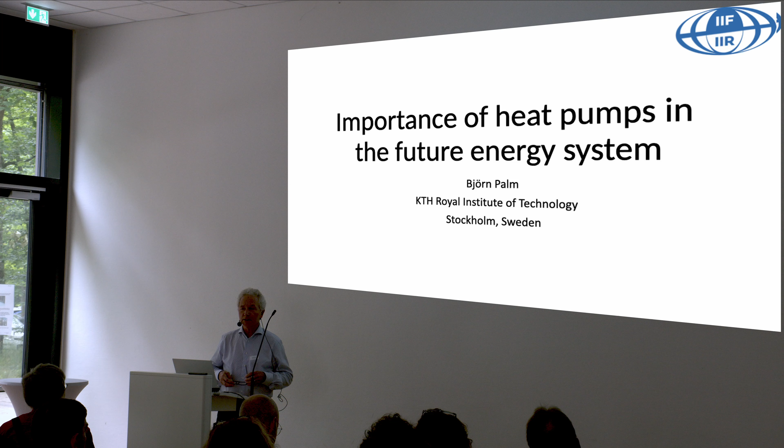If you look at the title, you can probably understand there are some similarities with the previous presentation, and you'll even notice some of the slides are more or less identical. But this will be a slightly different perspective, and it's too late now to redo the presentation. So let's go ahead and see what I have to tell you.

This is basically the outline of my presentation. I will mainly talk about these first topics: what is the problem, what is the solution, and what are the obstacles. Then I will talk a little bit about the last points here.

I realize this is a very informed audience, so in a way I will perhaps blow in open doors, but we will see what happens. For some other audience, I would be worried about having rotten eggs thrown at me, but I don't think this will happen today.

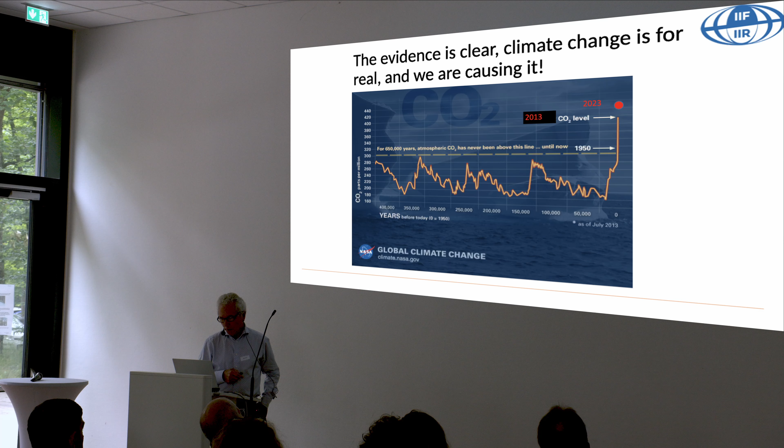So what is the problem? This is a problem. What you see here is a graph of the carbon dioxide in the atmosphere over the last 400,000 years. You can see that during all of this time, the concentration has never been above 300 ppm. And as you see, the concentration has increased incredibly during the last 50, 60, 70 years. This diagram was actually drawn from NASA's webpage in 2013.

Now if I put in the data for 2023, you can see that there is a noticeable change just for these last 10 years. So this is really alarming, of course.

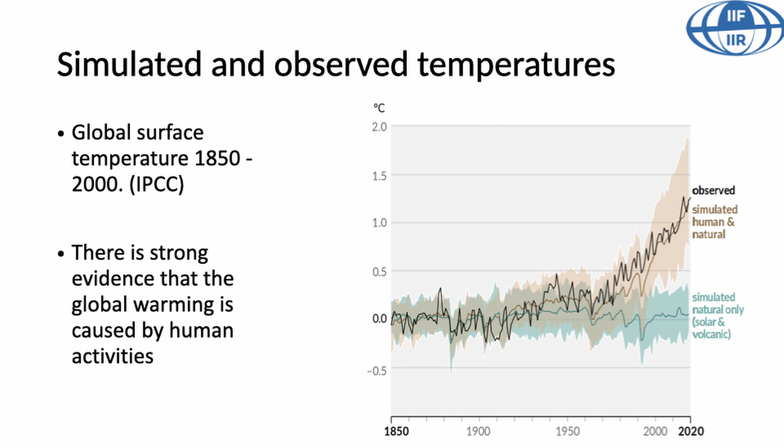What we see here is the result of simulations of global surface temperatures. This is the history, what's actually happened. With the same simulation programs, we can take out the emissions from our activities, and then we would end up down here. So we can show that without emissions from human activities, we would actually have about the same temperature levels as we used to have since the 1850s. I think this is good proof that it's actually our fault.

Now during the last year, a lot has happened actually. This is the global surface air temperature in July for the years since 1940 to 2023. You can see there is a steady increase, but also a drastic increase during the last year.

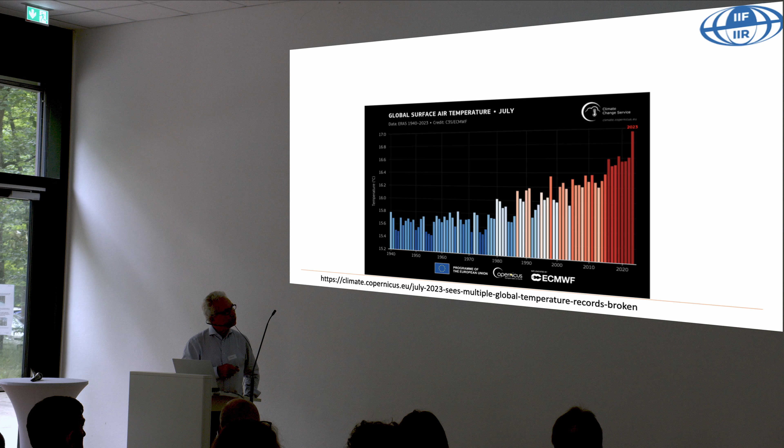We can also look at the last year from another perspective. This is showing the daily sea surface temperatures for most of the oceans over the years. Down at the bottom here you see further back in time, and the red line shows the temperatures during 2023 to 2024. You can see there is a big gap between the data for this year and all other years. So suddenly the sea temperatures have increased quite a lot, much more than they ever increased before.

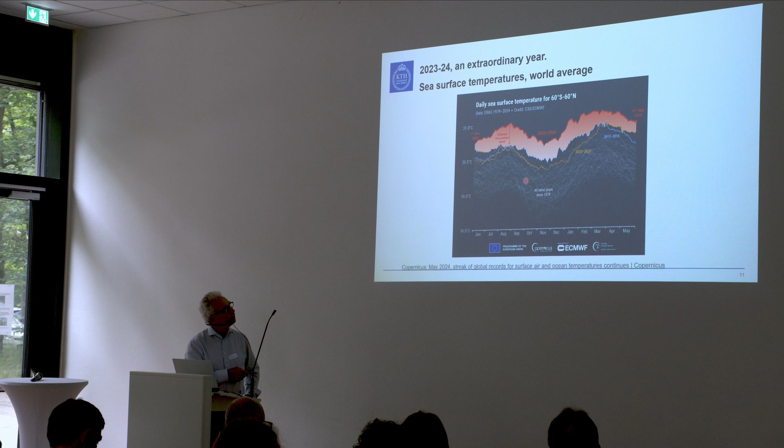And this is not yet explained why this is the case. So this is worrisome, I think.

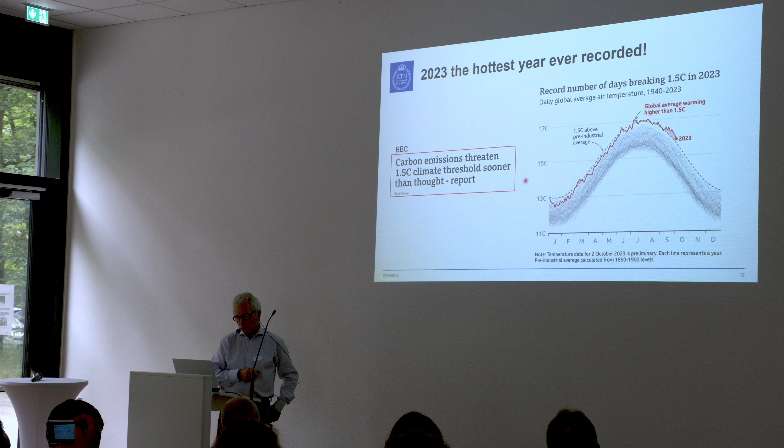If you just look at the temperature data for 2023, we can note that 2023 was the hottest year ever recorded, but recordings started in 1850 or so. So how about temperatures before that? Well, just recently there was a report in Nature claiming that 2023 was actually the hottest year in 2,000 years. And how can they find that out?

By looking at the tree rings on a lot of trees all around the northern hemisphere, this was deduced from that data. So global warming is happening.

It's happening at an increasing rate, and we really don't know what is happening during the last year because the increase has been much faster than we expected.

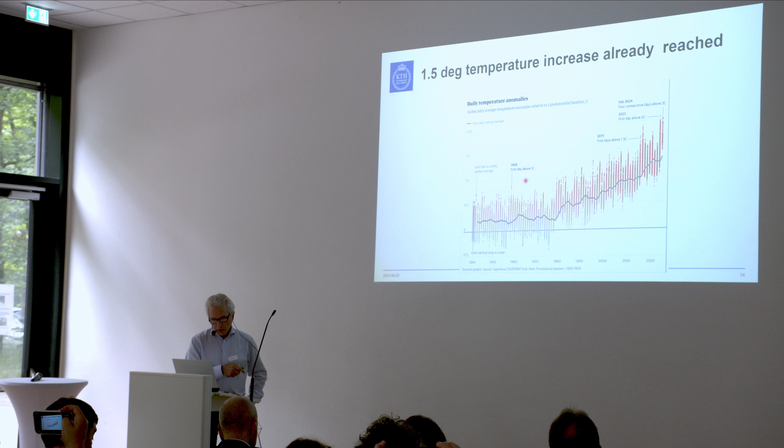This is also showing the temperature increase. The black line here is the 5-year rolling average, and you can see it's increasing, but it's lagging behind, so to say, as a 5-year average. The dots here indicate the days, with the temperature for individual days. You can see there are some days where we already reached more than 2 degrees above the pre-industrial baseline.

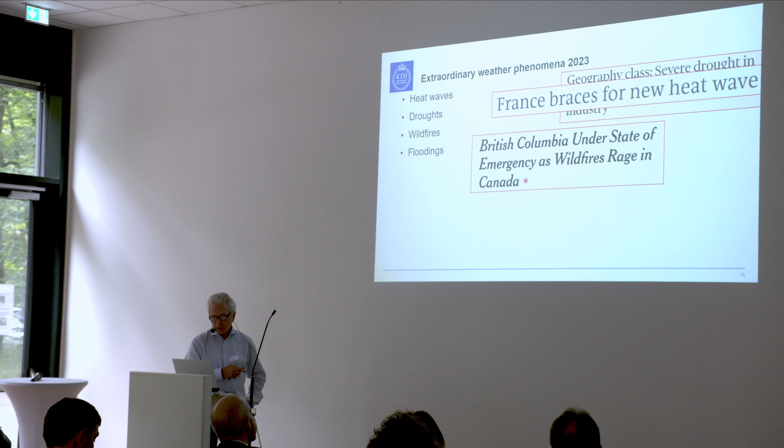So why do I tell all of this? We need a solution, of course. The solution so far has been the Paris Agreement—almost all countries in the world have agreed to do something about this and try to limit the temperature increase. This is the Paris Agreement in a nutshell.

On the vertical axis you see the annual global total carbon emissions, and the different curves relate to different scenarios. According to the Paris Agreement, we should keep well below 2 degrees, preferably at 1.5 degrees increase. From these graphs you see that to reach this we have to have not only zero emissions, but negative emissions after around 2050 or 2060—so not only stop emitting carbon dioxide, but also absorb it from the atmosphere.

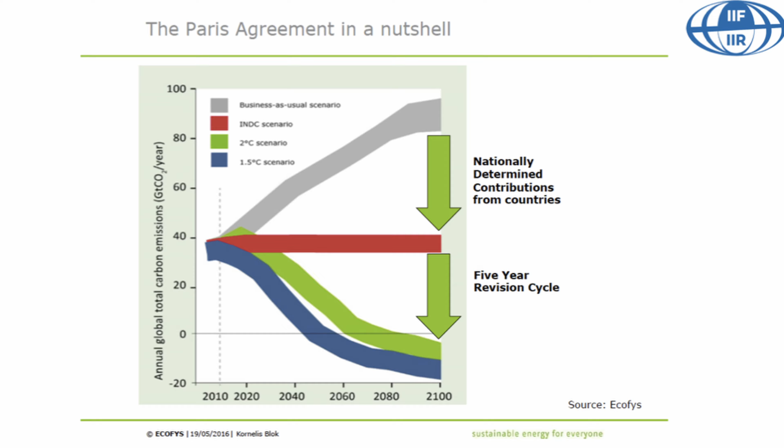Even though I speak to a lot of people from universities about their research, it seems a lot of times that people are really not aware of this still. They've sort of pushed this out of their mind. We have to stop using fossil fuels.

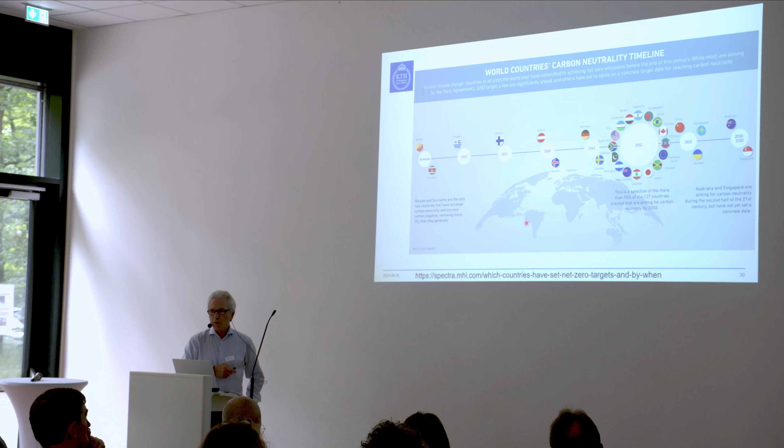Most countries in the world have now agreed on a year when they should be carbon neutral. You can see from this slide which year applies to which country, and for most it's 2050, just like Europe. That's not a very long time ahead. You probably remember when we celebrated the year 2000—that's 24 years ago—and this is more or less the same amount of years ahead of us to 2050.

So the question is, will we reach the goals? The UN has sent out reports saying that we may not do this—we may not reach these goals. We need to do more to reach them.

Recently there was an article in The Guardian where a lot of climate scientists were asked what they think the global warming will be by the year 2100. Each little box represents one person, and you can see that 77% of all the climate scientists expected a rise of at least 2.5 degrees. So the 2 degree goal is, according to most of them, out of the question.

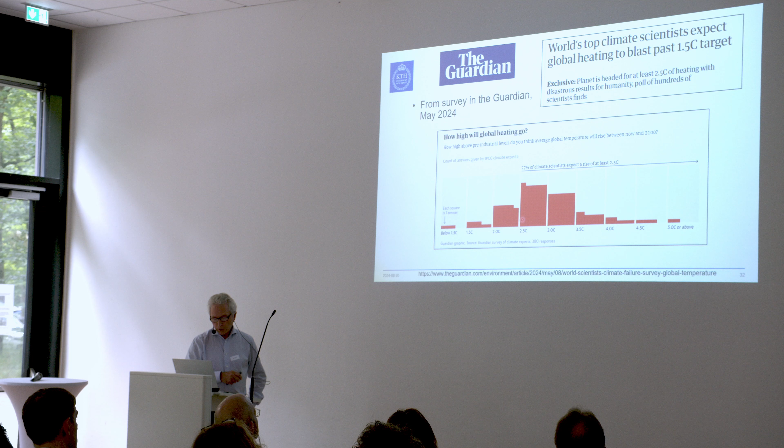So what do we do? In Europe, as we already heard from Thomas, we have several agreements and decisions about how to limit global warming or the release of greenhouse gases—the Fit for 55. I don't need to go back to this again, Thomas talked about it already. We have targets for 2030 and now also for 2040, or at least suggested.

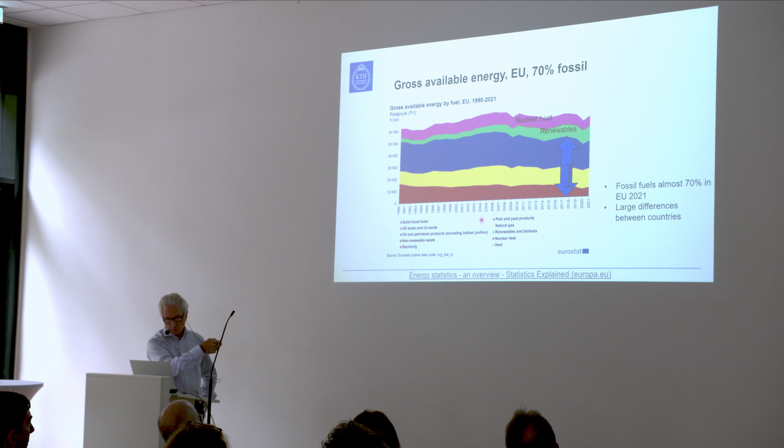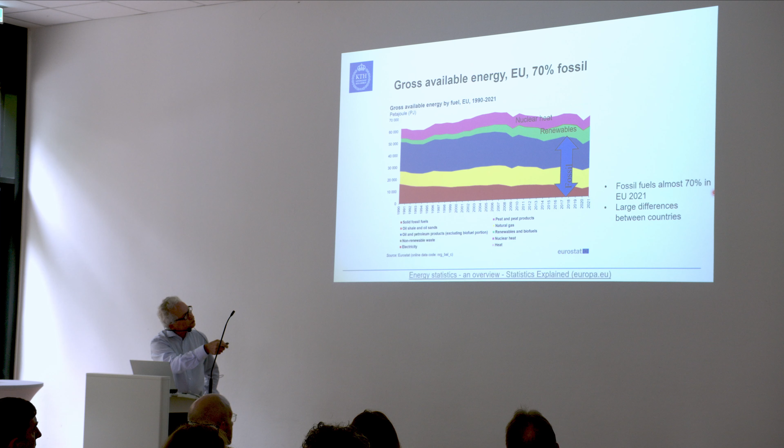I want to point to this diagram to show that we are still heavily dependent on fossil fuels—about 70% of the energy supply in Europe comes from fossil fuels, and worldwide it's about 80%, so just slightly better in Europe. We can see the green portion, renewables, increasing in size, so we're doing something, but we are very far from the goals. If we want to get that 70% down, we have to do a lot better than we have been doing so far.

So what is the strategy to reach the goals? I'm only going to talk about the building sector. That's where we have the heat pumps, or also some in the industry, of course.

I think these numbers come from the European Heat Pump Association, at least from Martin Forsén's presentation. About 40% of all energy in Europe is used in buildings, and this corresponds to about 37% of all greenhouse gas emissions.

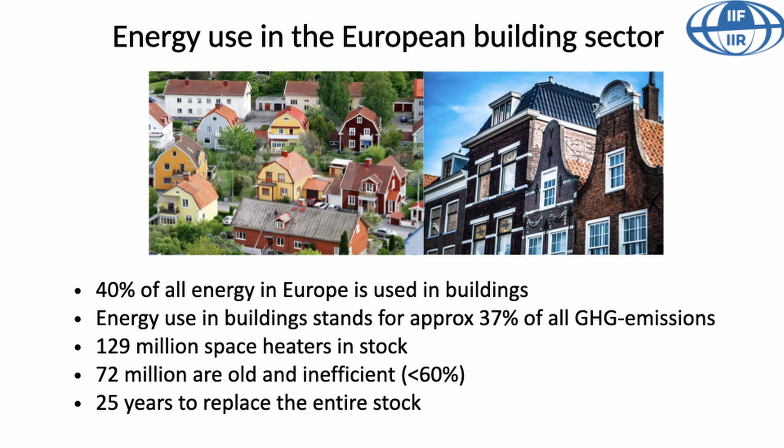There are many millions of space heaters. There are different numbers circulating, but according to this source, it's 129 million space heaters in stock, and many of them are old and inefficient. If we just replaced them at an ordinary rate, it would take 25 years to replace all these heaters.

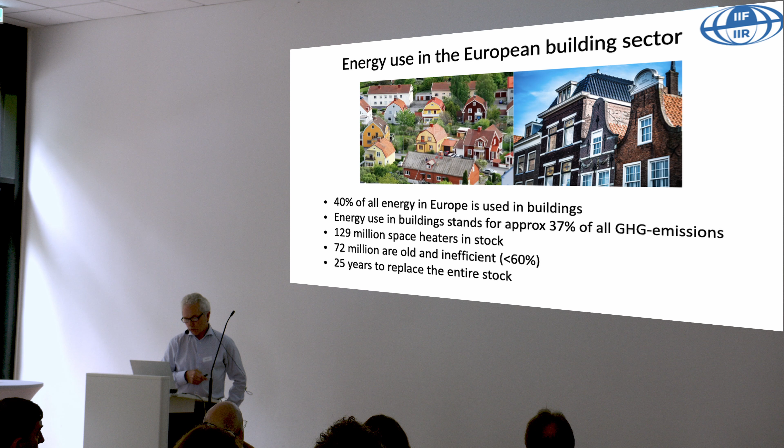One question comes up, of course: why don't we use biofuels instead? Of course this would be an option, but is it good enough? There's a lot of discussion in the EU right now about what we should do with the forests, whether we should allow them to grow. Keeping the forest is also a way to absorb carbon dioxide from the atmosphere, and the most obvious way to absorb carbon dioxide would be to not cut the woods.

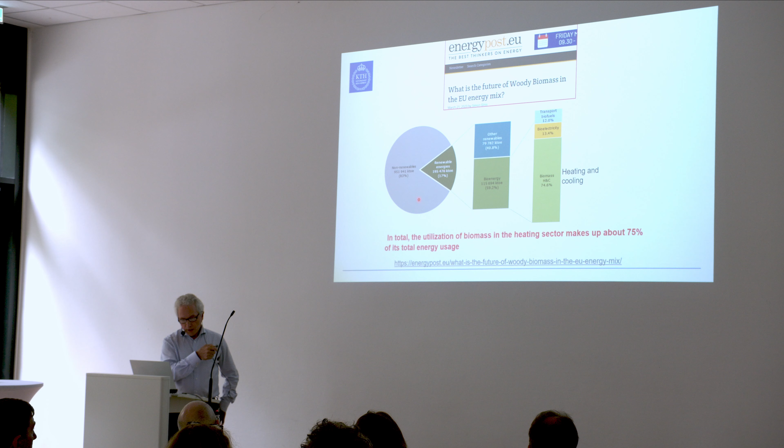Just to look at this—I could talk a lot about it, but I'll just show you one slide. This is from Energy Post, and you can see the gray circle represents all the energy supply, and about 17% of this is renewables. Out of this, about 60% is actually biofuels. This was a number which surprised me quite a lot—I didn't think it was so much.

We see a lot of wind turbines and solar PV panels, but actually biofuels make up a larger share of the total renewable energy sources in Europe than the other ones.

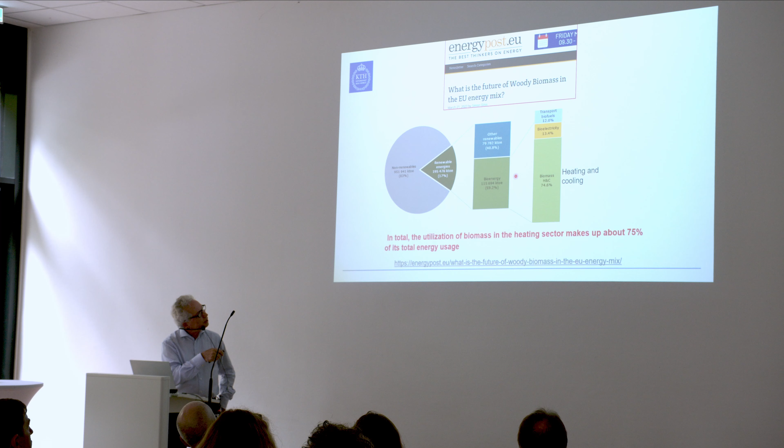And out of this 60% which is bioenergy, about 75% is used for heating and cooling. This may sound strange for us living in the city, but if you go out of the city, up in the mountains, people chop trees and use that for heating during the winter. And in the Scandinavian countries where we have a lot of forest, there are lots of wood residues from the wood, paper and pulp industries which are used for heating.

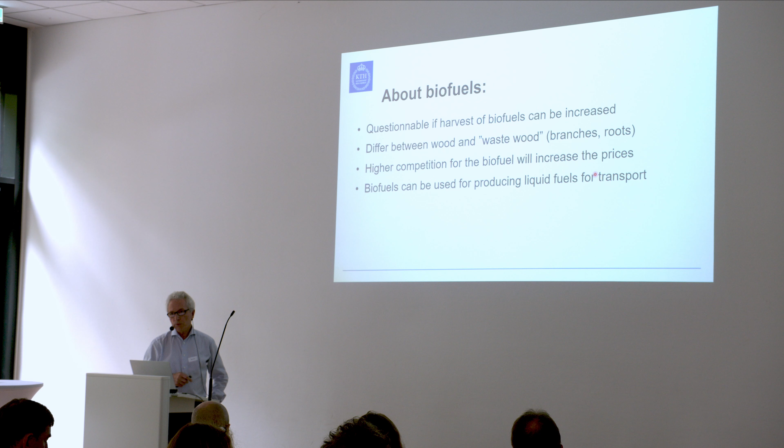I won't talk a lot about this, but I'll give a few sentences. It's questionable if harvest of biofuels can be increased. I don't think so—perhaps a little bit, but not nearly enough to substitute the 70% of fossil fuels being used now. When we talk about biofuels, we should differ between wood, good wood, and waste wood. Of course, we can use some biofuels even in the future—branches, roots and other things.

Something not often talked about is the connection between the price of biofuels and the price of fossil fuels. We saw this a couple of years ago when gas prices went up, biofuel prices went up at about the same rate. The day we're forced to stop burning fossil fuels, the prices of biofuels will definitely go up because there will be much more competition.

We should also remember that biofuels are very good for producing liquid fuels for transport, for ships and for airplanes, and perhaps these areas should be prioritized.

So the reality is that fossil fuels have to be phased out. Biofuels will not be enough. Synthetic fuels produced from renewables are inefficient—we talk about hydrogen, but if you use electricity to produce hydrogen and hydrogen to heat the building, it would be totally stupid. And renewables and nuclear come as electricity.

So the conclusion is that we are moving towards an electric society. We think about all our gas grids and oil tankers, etc., but that's out—in a few years they will be out. We'll have an electric society instead.

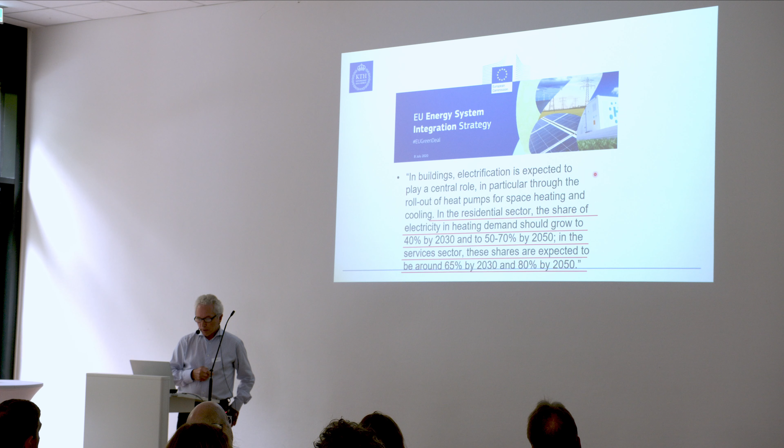And of course this has been realized, as Thomas already touched upon. Electrification is one of the key pillars which the new policies are built on in Europe. I'll cite a couple of statements in the documents: in the residential sector, the share of electricity in heating demand should grow to 40% by 2030 and 50 to 70% by 2050, and even higher in the service sector.

For the whole world, if we go to the International Energy Agency and see what they state in their heat pump outlook, they say that the proportion of heating equipment sales accounted for by heat pumps nearly triples by 2030 and continues to grow thereafter. Heat pumps become the leading heating and cooling technology in buildings worldwide by 2040. So it's not only here.

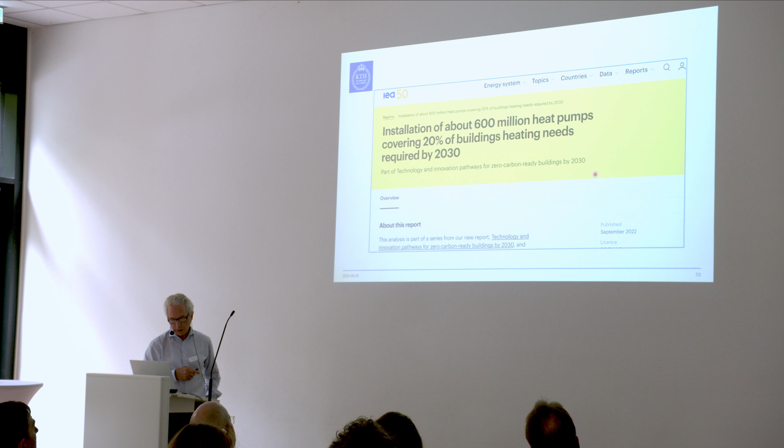This is from a recent report—I'm not sure I even believe this number, but I hope they know what they're saying. Installation of about 600 million heat pumps, covering 20% of building heating needs, is required by 2030. This is from one of IEA's reports.

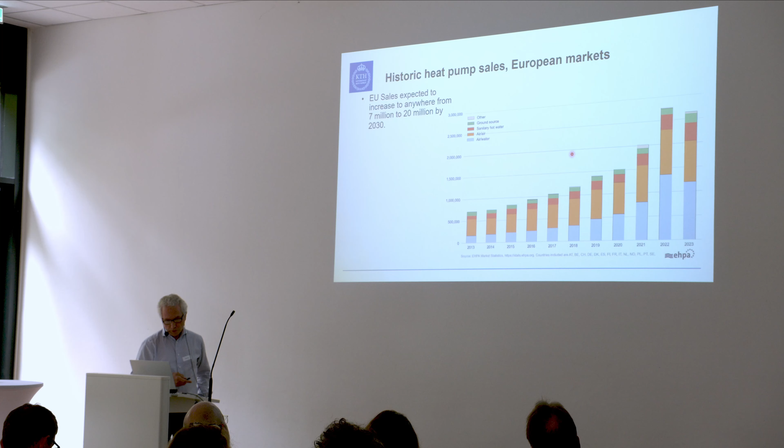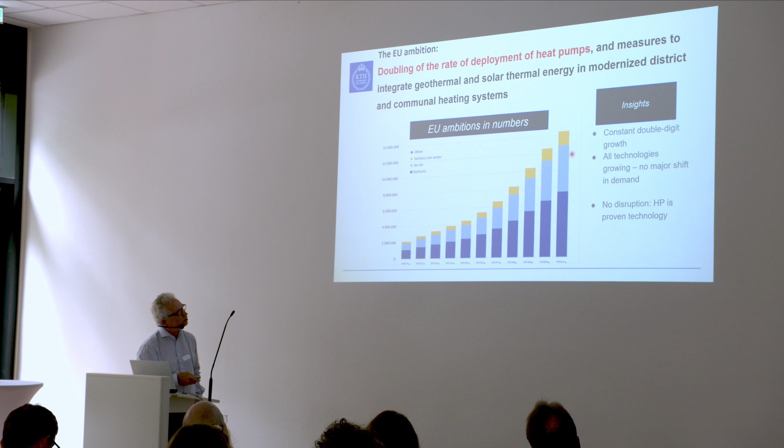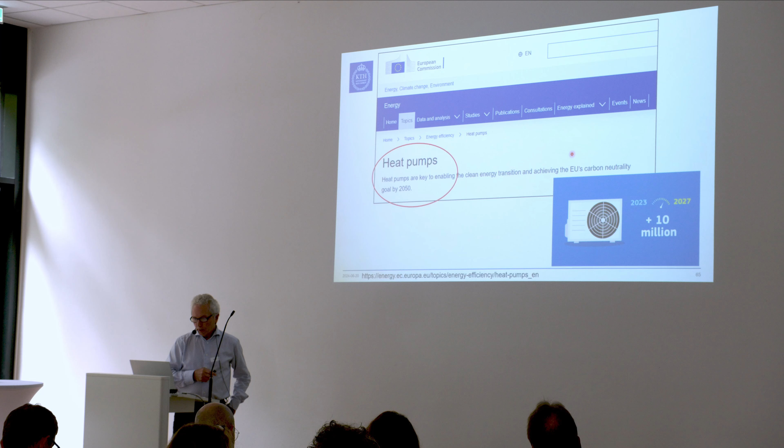This is another statement from the European Commission, where they say we should install 10 million heat pumps per year by 2027. This is more or less what the previous slide showed also.

We talked already about the European Heat Pump Action Plan, which was expected but was postponed, so we'll see what happens to that. In France, they already have a national heat pump action plan, and according to this plan they should produce 1 million heat pumps per year by 2027. So they're already on their way to letting their heat pump industry grow very much.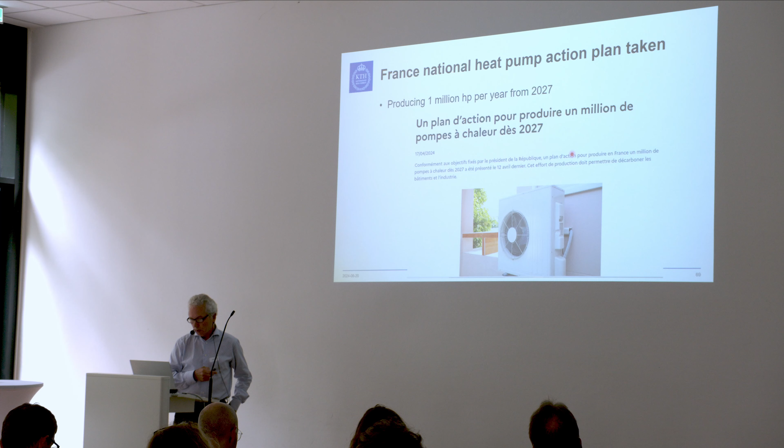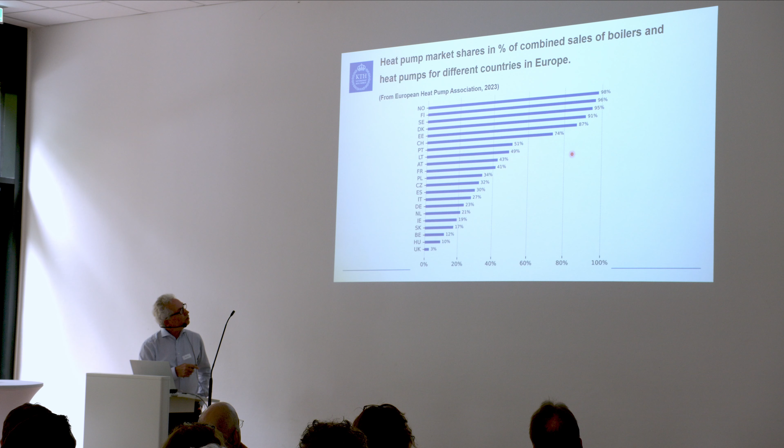We should also remember that heat pump markets are very differently mature in different countries. This shows the chance that a buyer would buy a heat pump rather than something else. You can see that in the Scandinavian countries, Norway, Finland, Sweden, Denmark, the chance is more than 90% that if you buy a new heater for your house it will be a heat pump. On the other hand, at the bottom here in Hungary and UK in particular, the chance is just 3%. So it's a huge difference between the different countries.

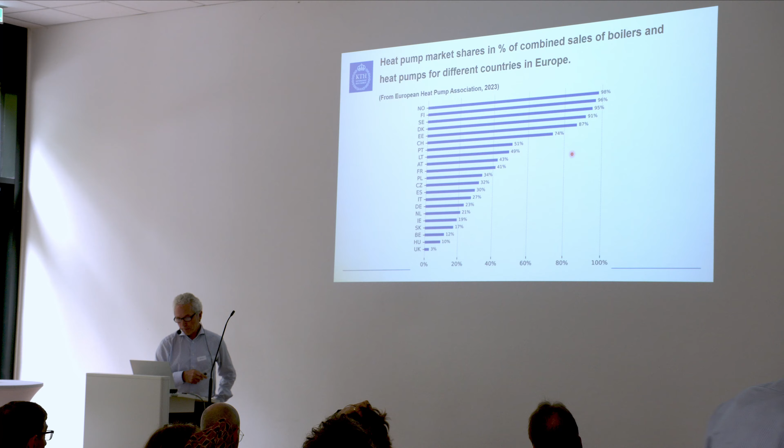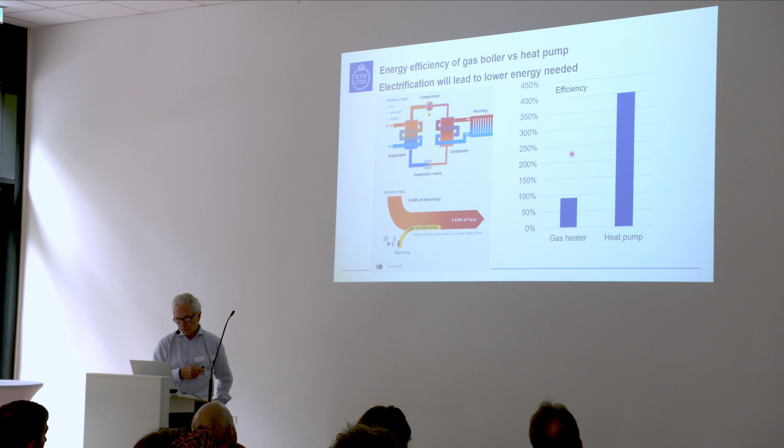So what are the obstacles? Can we use fluorinated gases as refrigerants, F-gases, in the future? I'll skip that in the interest of time.

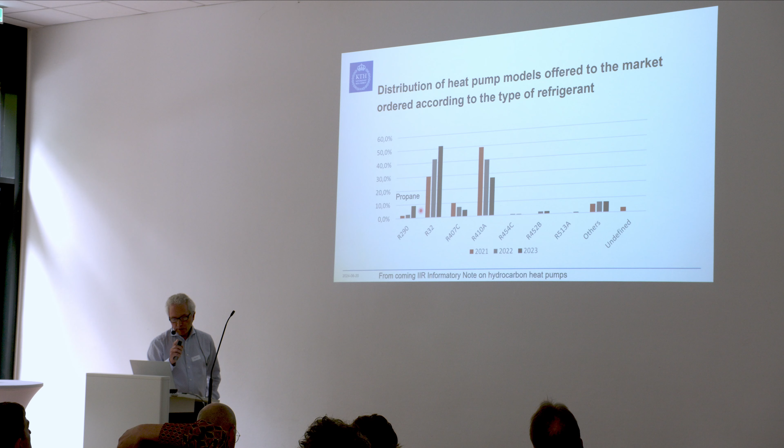This is a distribution of heat pump models offered on the market, ordered according to refrigerant type. For the three years 2021 to 23, R32 is increasing, R410A is decreasing, and propane is actually increasing too, getting close to 10% here. This is not the sales, this is the number of models available on the market.

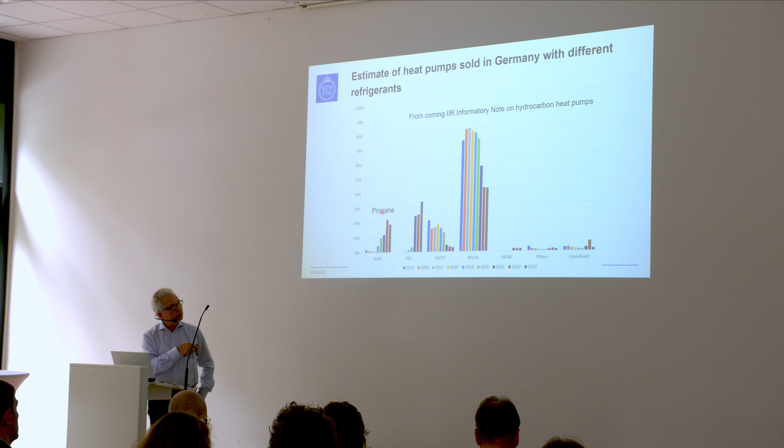Similar numbers are found in France. If you look only at the air to water heat pumps in France, the figures are expected to be about 25% propane, and probably this would be similar in Germany if we just looked at air to water heat pumps.

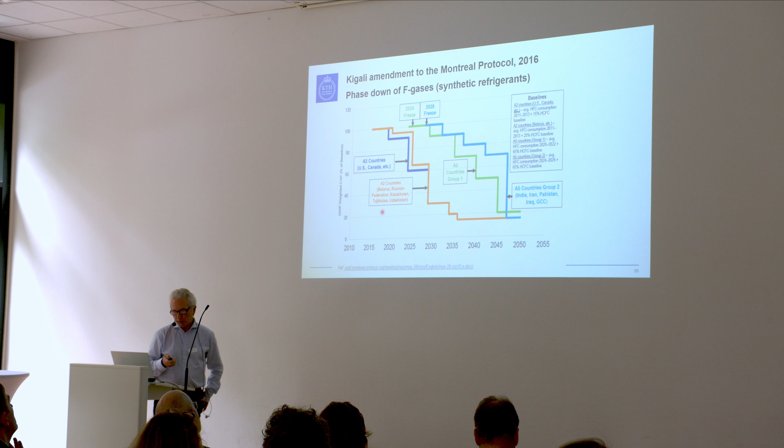We know the Kigali Amendment to the Montreal Protocol forces all countries in the world to phase down F-gases. In Europe, we have the new F-gas regulation, which actually phases out HFC refrigerants, not HFOs, but HFCs, and this is supposed to be done by 2050.

We also have bans for certain products with certain refrigerants, and I'm sure many of you are well aware of this. For small systems, less than 12 kilowatt capacity, no HFO or HFCs will be allowed after about 2035, different for different types of products. Larger systems can have refrigerants with GWP, but they have to have GWP lower than 150 from 2030. So there is a definite tendency towards low GWP refrigerants, and for small systems we will also have a phase out of the HFOs, not only the HFCs.

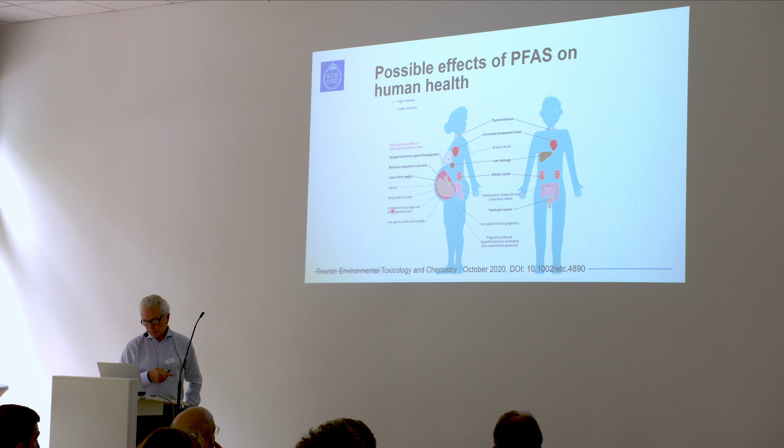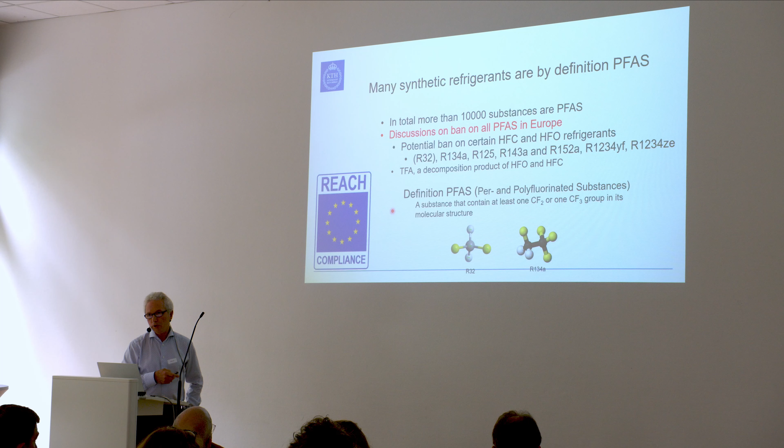There is an additional problem, and that is the possible ban of PFAS. PFAS, as you probably know, is a group of substances, tens of thousands of substances, of which some are dangerous, and we don't have a clear picture of which ones are dangerous or not. In Europe there is a suggestion to phase out all PFAS substances, and that would include almost all of the synthetic refrigerants which you are using right now.

So how will we handle the refrigerant problem? Synthetic refrigerants are strong greenhouse gases or belong to this PFAS group. Phase out of F-gases decreases the available amounts of synthetic refrigerants, and the exponential increase in heat pump sales will require substantially more refrigerant than we had before. So the industry has a problem here, and the natural alternatives are flammable and/or poisonous. But in my opinion, we will have to learn to design safe systems with flammable refrigerants in the future.

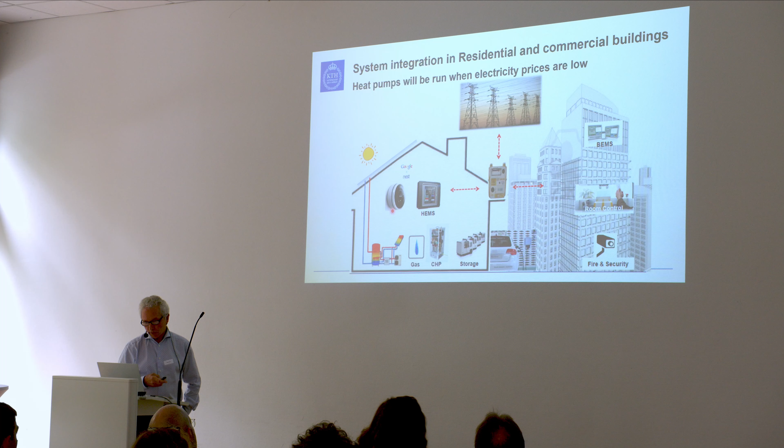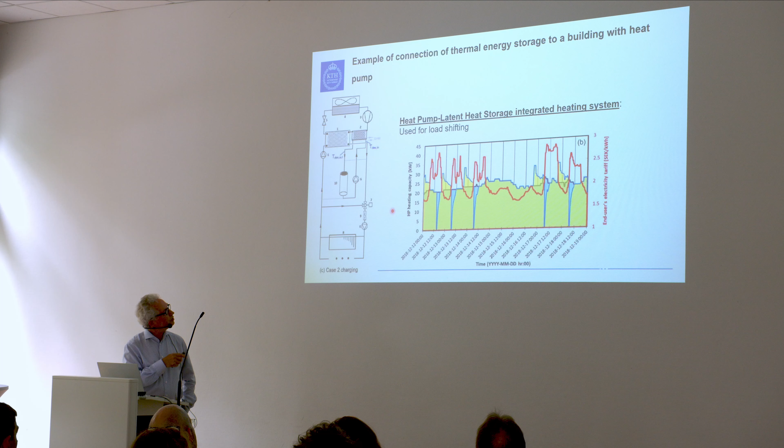I realize my time is more or less running out here, so I will just show you a couple of slides. I believe that heat pumps in the future will be considered as part of a complex energy system. We will use heat pumps to even out energy prices and the availability of electricity by storage. This is an example of a heat pump with storage connected.

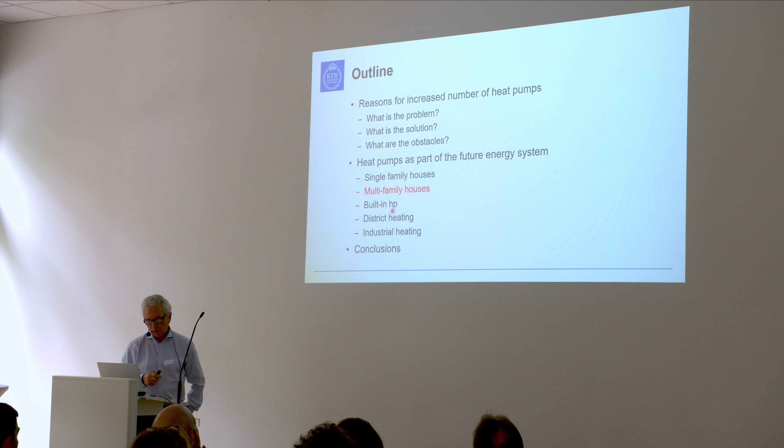We can also use borehole thermal energy storage connected to the heat pumps, and aquifer storage if that is possible, and all of these solutions require heat pumps because the storage temperatures are much too low. We already see built-in heat pumps in many of the whiteware we buy and in electric cars. In district heating in Sweden, we already have some heat pumps in the district heating systems, but I guess in the future we will see much more.

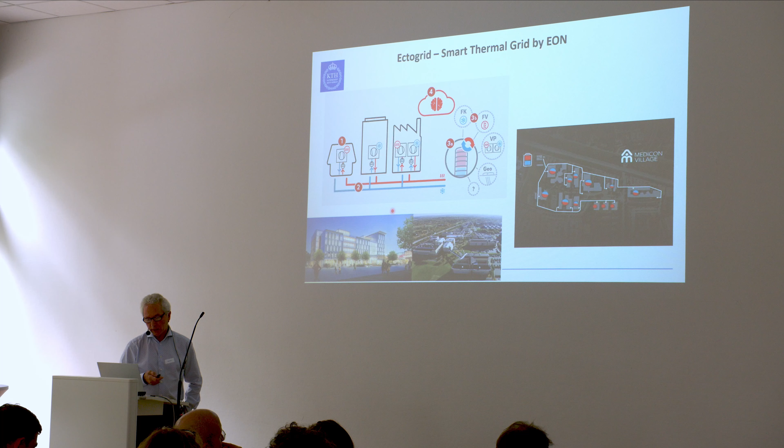We could also talk about low temperature grids, smart grids, and of course this requires heat pumps in every house because the grid will have a too low temperature.

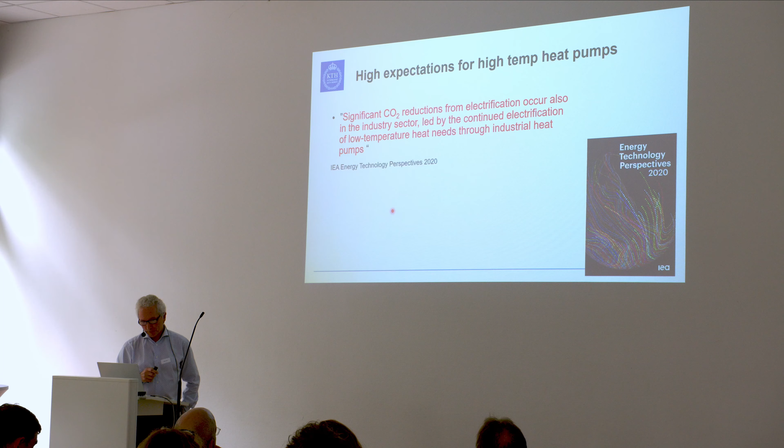Final slide more or less. I believe that we will see more heat pumps also in industries. We know that there are already heat pumps available which can produce heat at 150 degrees or so. There are large such heat pumps installed already, so the technology is there, and we know now from the district heating grid owners that they are very interested in this. We hear this from the companies.

So with that, I go to the final slide, and I will leave this on, and you can read it once again if you want. Thank you very much.